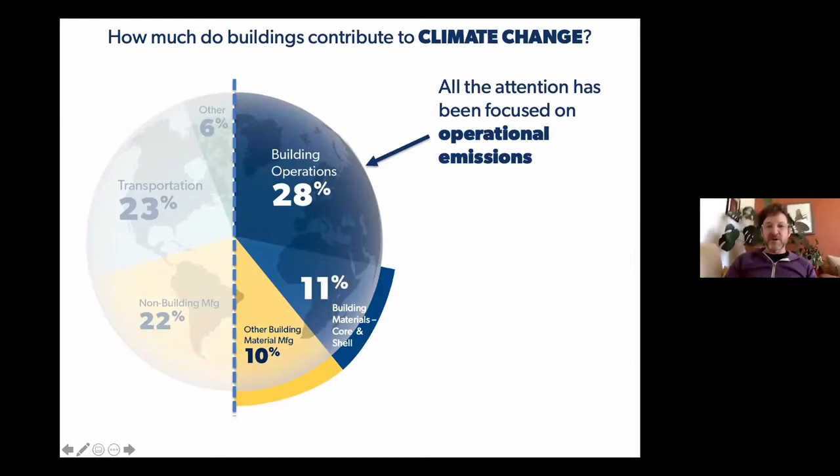That's been a key focus of the work, but it's only very, very recently that any attention has really been paid to the emissions that come from the materials we use to make those buildings in the first place.

The first look at that showed that key core and shell materials—basically concrete and steel—for the building sector were about 11% of total fossil fuel emissions on the planet. But a more recent scan looking at materials other than those big ones shows there's about another 10% of material manufacturing emissions related to buildings.

So, in total, that's 20% of global emissions. This is a piece of the puzzle that we really have to pay attention to.

It's really important because these are emissions that are happening right now. When we bring a building into being, the emissions associated with its materials have occurred in the relatively short time frame prior to us building that building, and that means there's no chance to address them later.

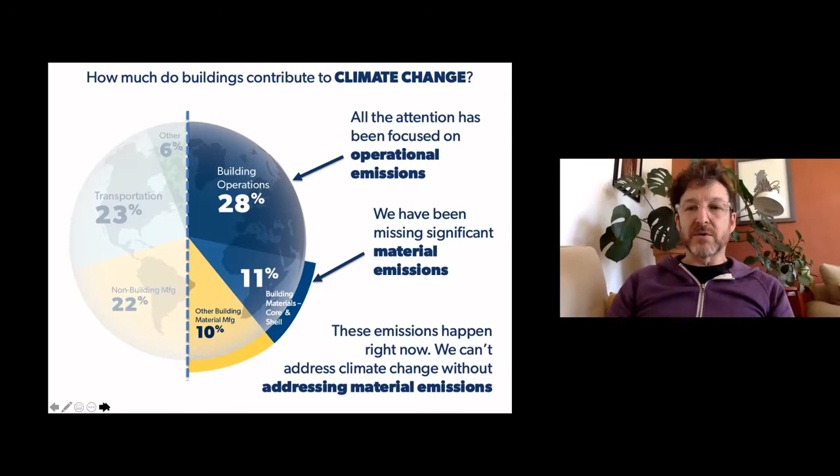With energy efficiency and operational emissions, we can always clean up our energy source and improve the building. But the emissions from materials have already gone to the atmosphere—there's no calling them back or doing a better job once we've committed to those.

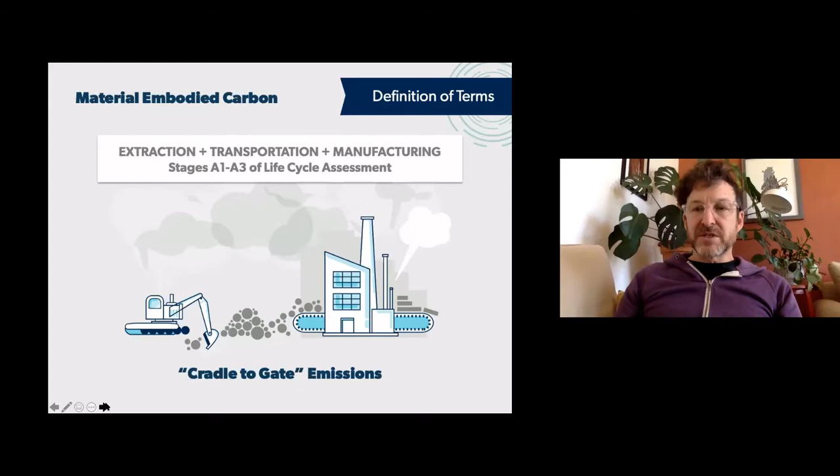I'm going to be focusing specifically on material emissions, looking at the product phase of life cycle emissions. If you're familiar with LCA, this is stages A1 to A3, better known as cradle to gate emissions. This looks at everything that goes to the atmosphere as a greenhouse gas, from harvesting or extracting raw materials, to transportation to factories, and all the processing that happens there. It's everything it takes to get a product from raw materials to a ready to install product. It's not including transportation to the job site, or any construction emissions or end of life emissions.

The reason I'm putting the emphasis here is that these emissions are typically, 60 is a low number, it's more often 70 to 80% of the full life cycle emissions for any building material at this product phase. So this is really the lion's share of this problem. And it's also the part of the issue that we can actually address by thinking about the materials we're using and potentially material swapping.

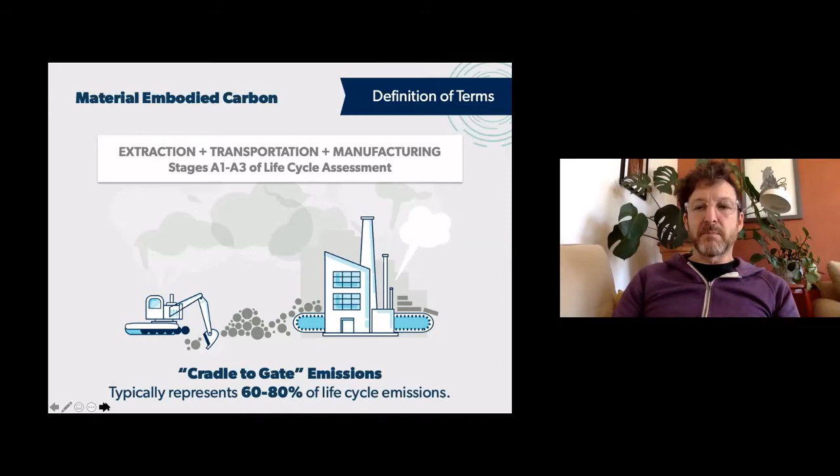That's a little bit about the background, what piece of this puzzle I'm actually looking at today. I'm going to be talking about not only materials that create emissions, but materials that are carbon sinks or offer carbon storage in buildings. Essentially what I'm talking about here is plant-based materials, or biogenic materials. They're very different than non-biogenic materials, because plant-based building materials, whether it's a tree, or a straw that goes into a straw bale, or a piece of bamboo, or a slab of cork, or hemp, and timbers of all different kinds.

There are so many plant-based building materials out there, and all of them draw carbon dioxide out of the atmosphere to grow themselves. Through photosynthesis, that CO2 comes out of the atmosphere, and the carbon atoms stay in the plant. Most dry plant material is about 40 to 50% carbon by weight, and all of that carbon came out of the atmosphere while that plant was growing.

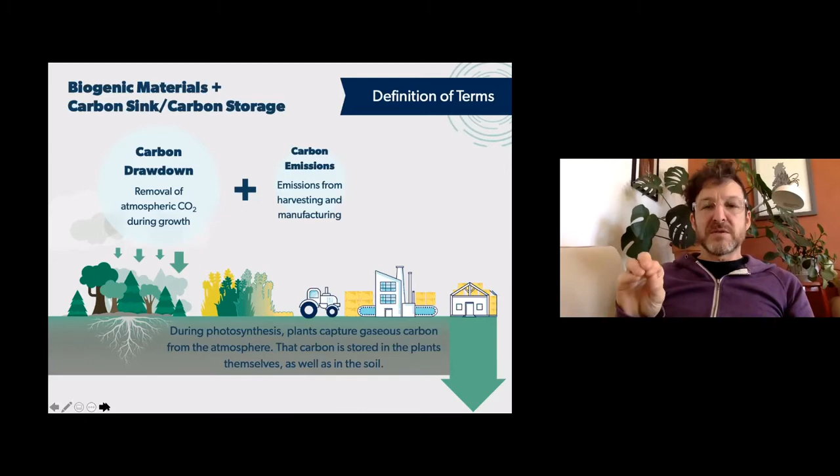In order to transform those plants into building materials, we create some emissions through harvesting and manufacturing. But in all of the examples I've looked at, those emissions are much smaller than the drawdown that happened when the plant was growing. So there's a whole category of materials that offer net carbon storage. As I'm doing the carbon accounting, essentially any materials that have emissions associated with their production are a positive number, driving the carbon footprint of the building up. These biogenic materials are negative numbers in that accounting, and they're drawing that total down.

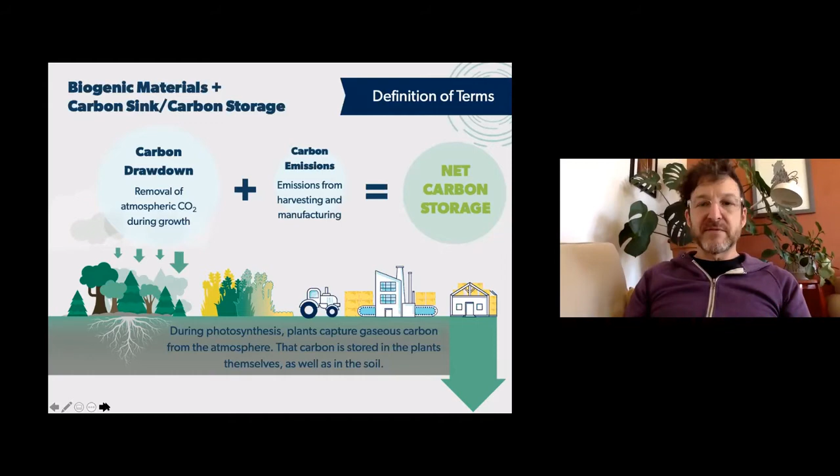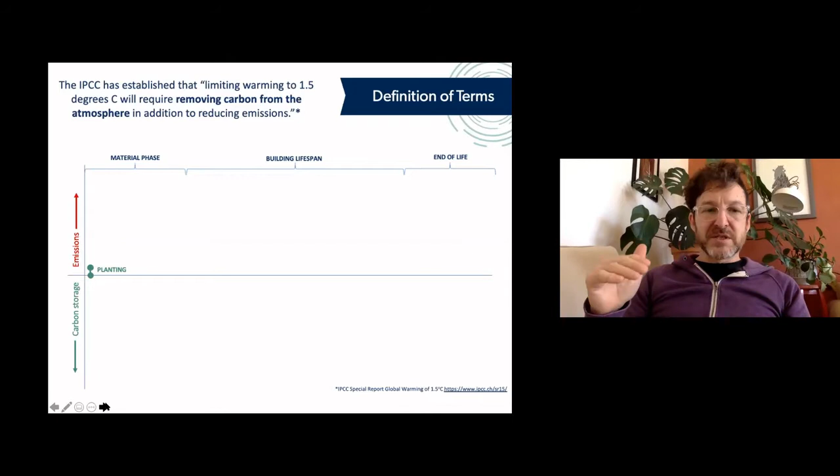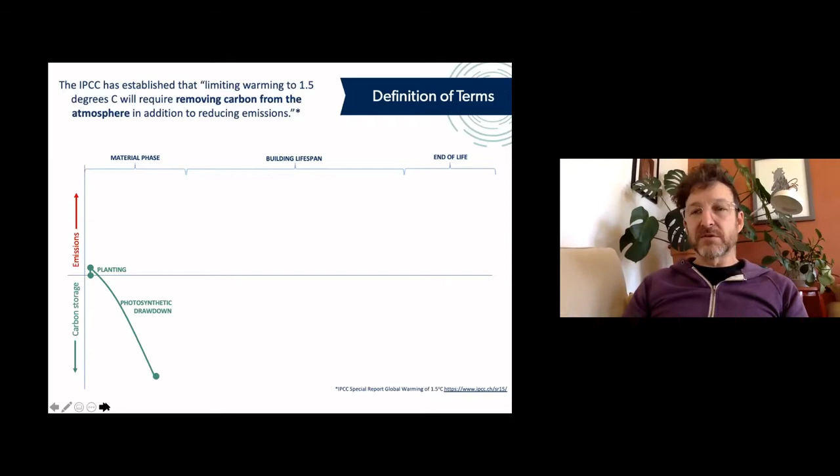Whether that's reforestation or agricultural practices, there will be some emissions associated with that. But over the lifetime of that plant growing, this period of photosynthetic drawdown could be 3 months for a wheat straw, or it could be 80 years for a northern species tree. Whatever time it takes for that plant to grow and mature, it's pulling CO2 out of the atmosphere that whole time. So in effect, there's less CO2 in the atmosphere when that plant is done growing than there was when it started growing, besides the fact that humans keep adding more to the atmosphere.

But you can see what I mean. Then, through harvesting, manufacturing, transportation, and construction, we are going to be adding emissions back into the atmosphere. But as long as those emissions are less than the amount of CO2 that the plant has drawn down, that means over the lifespan of the building, which we would certainly expect to last at least as long as the next few decades, when we're really having to scramble to try to fix the amount of carbon dioxide in the atmosphere.

These plant-based building materials are literally acting as carbon sinks, or carbon banks, or carbon stores. People use a lot of terms for it through the length of time that building exists. And obviously, the longer we can make those buildings exist, the better and more meaningful that storage becomes in the overall climate change scenario.

And then at the end of life, there's a bunch of scenarios where that carbon can continue being stored. So if we can reuse those materials in another building, then with a small amount of emissions associated with taking them down and retransporting them, that stays in storage. Same with if we're able to recycle them into other long-lasting products that keep the carbon in storage.

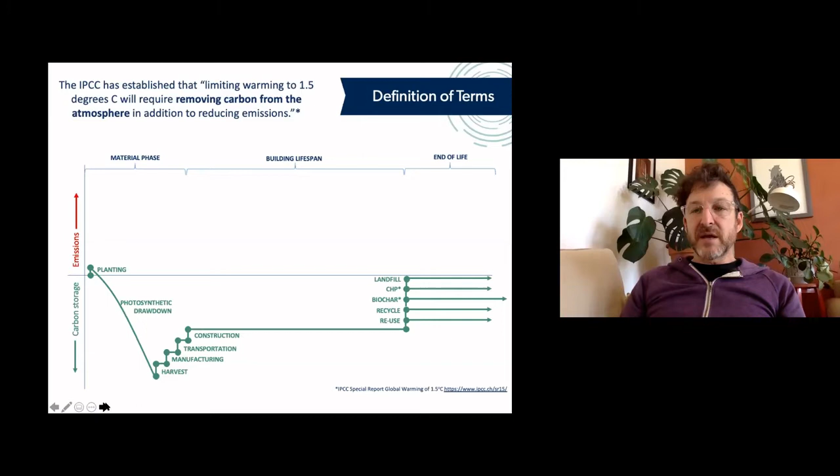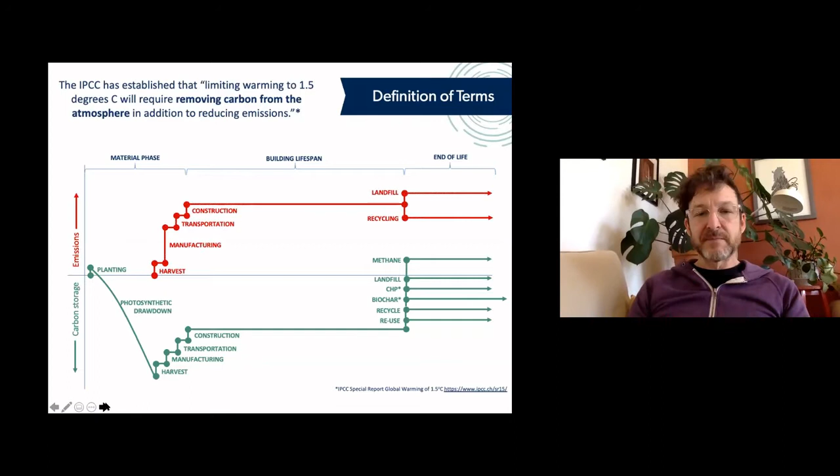If we landfill, it's not the greatest option, but certain landfill practices will ensure that much of that carbon stays locked up for a very long time in the landfill. And of course, worst case scenario, it becomes methane, and we have emissions again at the end of that material's life. So we want to avoid that if we can, because in all the other scenarios, we can expect the carbon to stay out of the atmosphere, or the majority of it, longer than just the building's lifespan. And that maps really differently than any other type of building material.

So it doesn't really matter what the material is. If it's not plant-based, its profile looks like this red line, where every single step along the way is an emission. And the height of that red line—a material with high emissions is going to be higher over the zero line. A lower emitting material will be lower. But wherever it falls, it's all emissions.

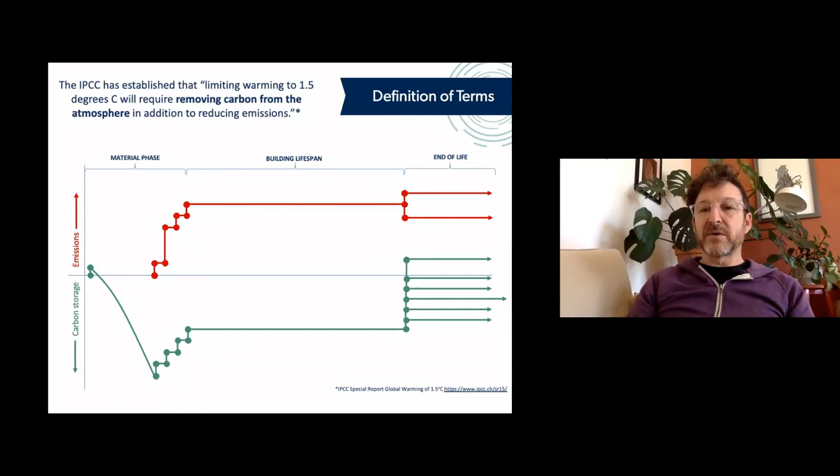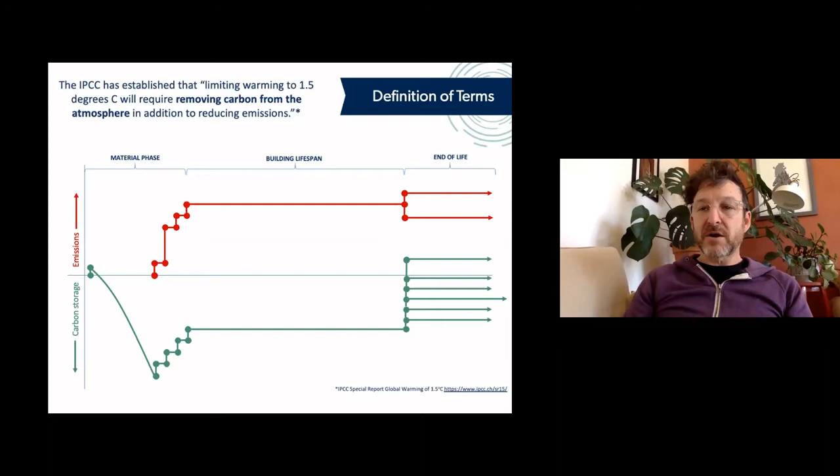And that means that by the time it gets in a building, those emissions are all in the atmosphere, and they're not coming out from the building. And again, even what happens at the end of lifespan, the emissions are still going to be in the atmosphere. So there's a really different scenario between that red line and that green line that is, I think, a really critical piece of our sector being able to really address climate change and to take advantage of buildings as long-lasting fixtures capable of banking and storing that carbon for decades or even centuries.

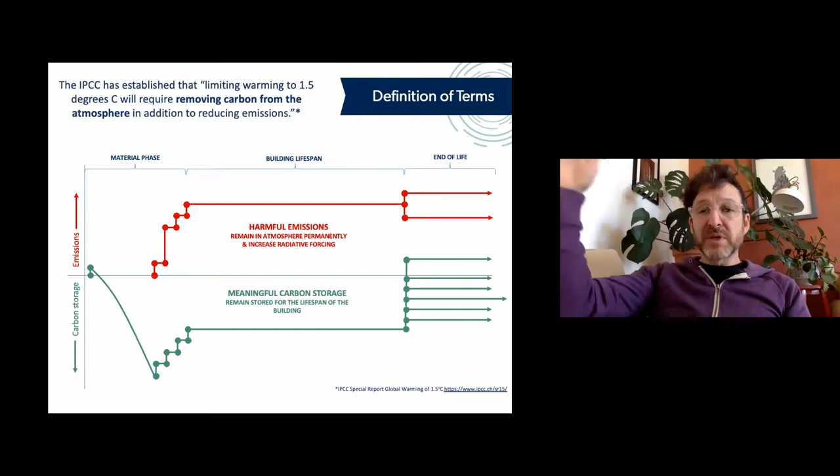And so, you know, in some ways this graph is misleading, because that red horizontal line should actually be an upward curve, because emissions stay in the atmosphere, and the radiative impact accumulates over time. So if we dump a bunch of emissions into the atmosphere making a building, they drive climate change again next year, and the year after, and the year after. So what we really want to do is get our whole industry down to that zero line, or better, below it.

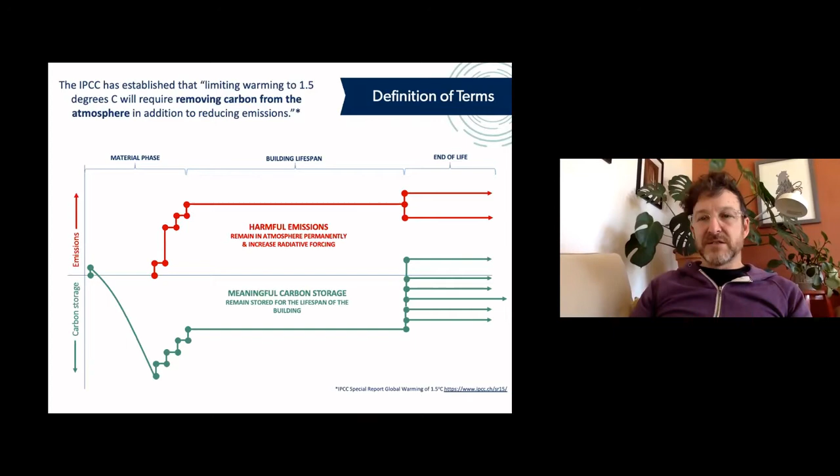So I'm going to show you a study that I did that I wrapped up in 2019, where I wanted to look at the carbon footprint of those building materials in some typical residential type buildings. I'm a residential builder, so that's kind of my focus. So what I did was I picked a really common single family home design, a 2,000 square foot raised bungalow, and a 4-story, 8-unit, 10,000 square foot multi-unit building.

And then I gathered what are known as environmental product declarations, or EPDs, which are sort of like report cards on impacts from products—in this case, building products. And what I like about using EPDs as my data source is that the way an EPD is made, the person accumulating the data is following a set of ISO standard rules. So there's an international agreement on what you include and what you don't include, and how you actually perform one of these studies. And I also like the fact that in order for an EPD to be released publicly, it needs to be either done by, or at least verified by, an outside third party.

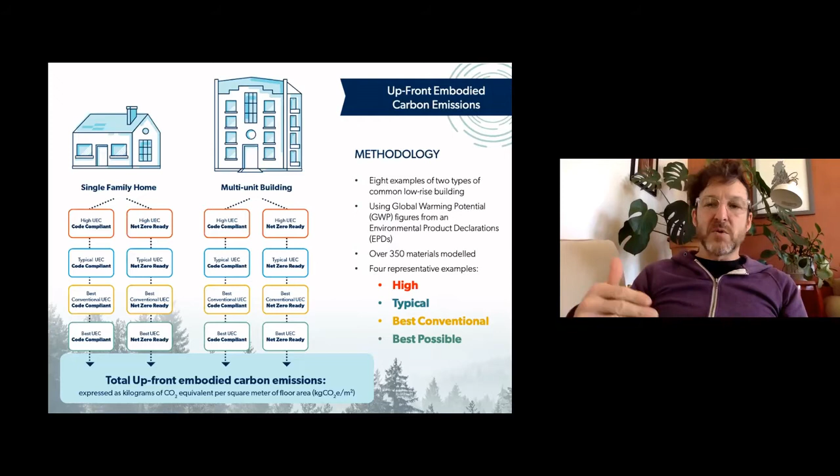So the companies themselves who are disclosing this information—the data is from them and from their operations—but a disinterested third party has been paid to either do the work or review the work and make sure that the rules have been followed.

So in terms of finding comparable data, this is as good as it's going to get for being able to compare products side by side. And what I noticed as I collected EPDs for building materials was that for every single element of a building, whether I'm looking at foundations, windows, flooring, roofing, or insulation, there were always materials that fell across a spectrum of results.

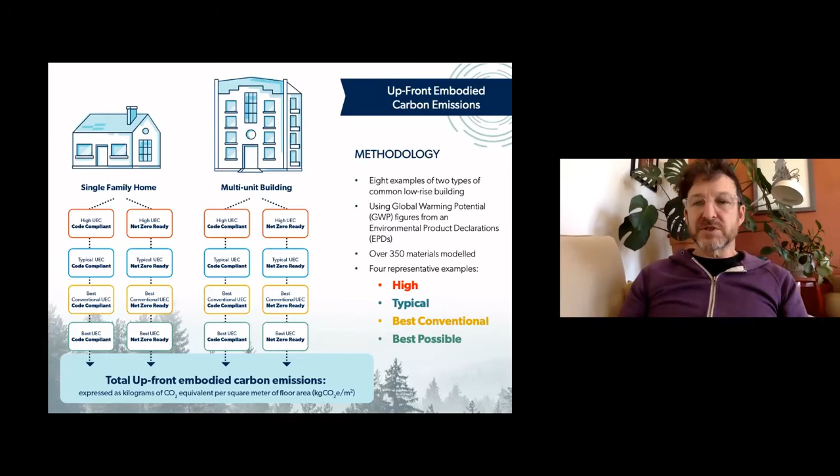So I've characterized those results with a sort of red typology building. In that model, I used materials that were always at the highest end of their category. I used blue to signify materials that were in the mid-range, moderately emitting materials. I used yellow to represent the best materials in their category that are currently widely available and code compliant - I call it best conventional. And then another series of materials I characterize in green, which just had the best, lowest carbon footprint result, regardless of whether they might be considered alternative or not common in the North American market. That wasn't one of the parameters - it was just, what are the best options?

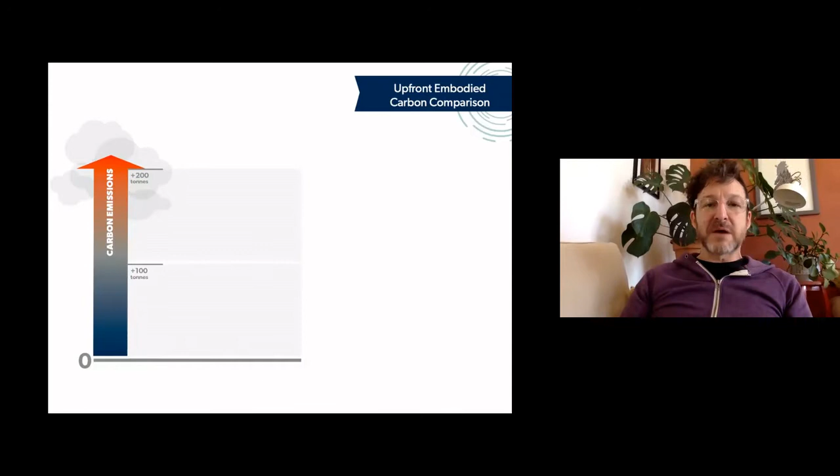So I'll show you what this looks like when I do all the math. I designed the building as though it was going to meet Ontario code minimum standards. I'm showing you the results for the 8-unit building here, but the single family building tracks in a very similar way, although per square meter, the smaller buildings tend to have a higher carbon footprint. So then I did material takeoffs, and applied the global warming potential factor from the EPDs to the amount of material it would take to meet code minimum standards for that building.

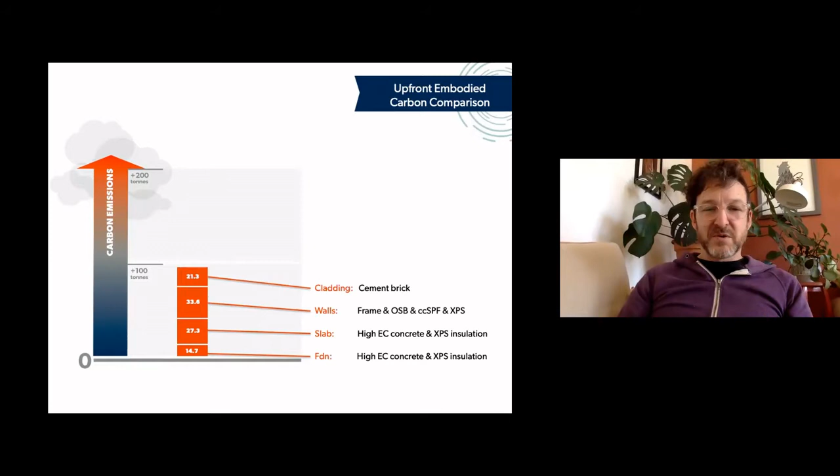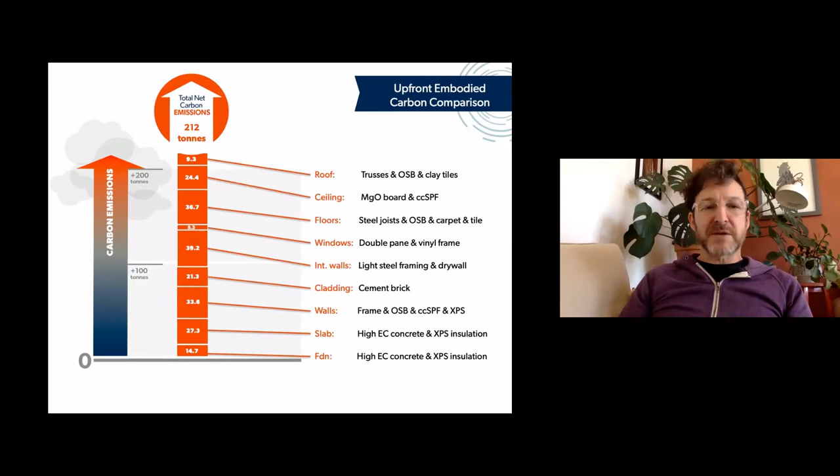We won't dive into all of these materials and details about them. But if I run the numbers for a building with materials at the high end of the carbon footprint spectrum - and if you scan that list, you'll see this isn't a weird building or just an academic exercise in what a high carbon footprint could be. Lots of buildings are built with these materials. In this case, we have over 200 tons of emissions associated just with making the materials for this building.

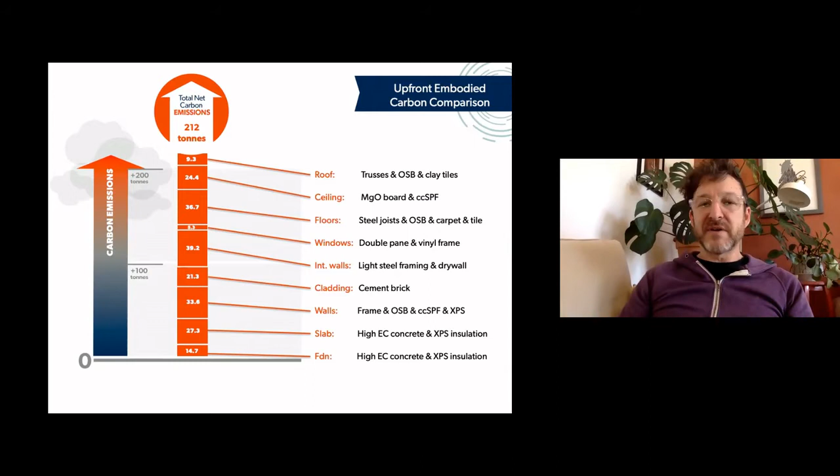And that's a really high amount of emissions, and there's literally no way anybody's going to meet their climate change targets, whether locally, provincially, nationally, or globally, if every single small building that gets built has a carbon footprint of this kind of size. But this is kind of where we are right now.

I then modeled a building where I just swapped out materials for things that were more moderate emitters in their categories. What's interesting is that right away, through some really simple material substitutions, I can bring the carbon footprint of this building down to 68 tons. That's a massive change, a huge improvement, made not by doing anything alternative or out of the ordinary. It's again a very recognizable suite of materials, but I've more than cut that building's footprint in half by swapping out those materials.

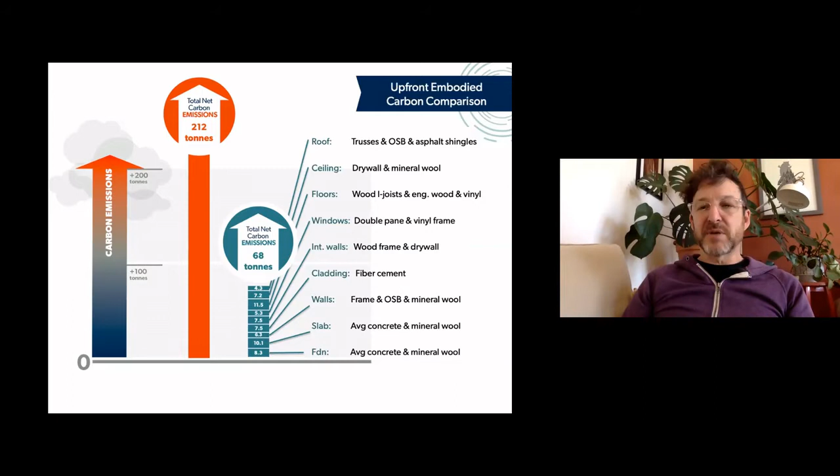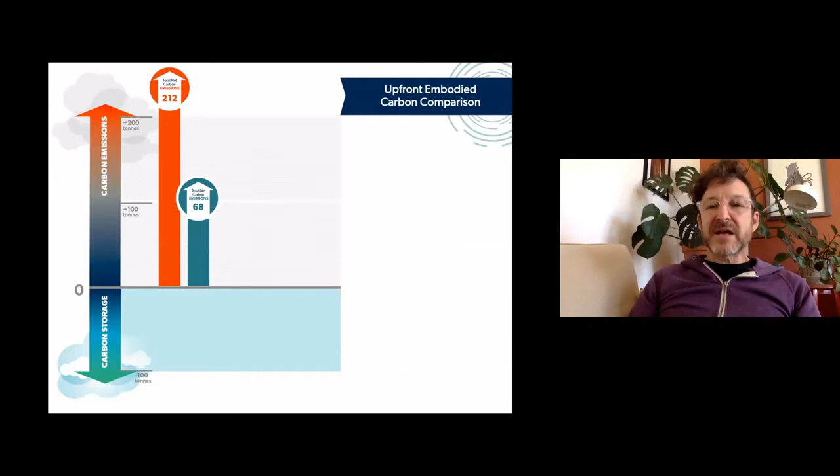Now, my third example building - you'll see the graph has changed here. I've needed to add a storage direction for this graph, because this is the first building that's going to involve some of those plant-based materials. This building actually, to me, was super exciting. It's not something I expected to find in this study, but I was really encouraged by the fact that I did. So here's our first negative number.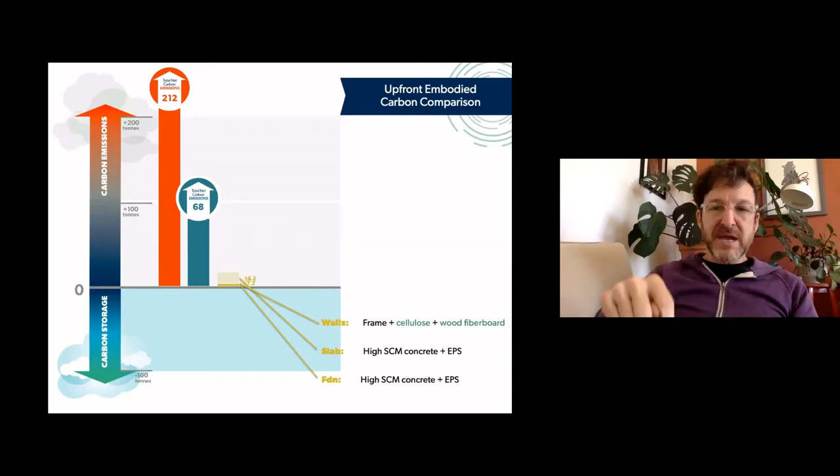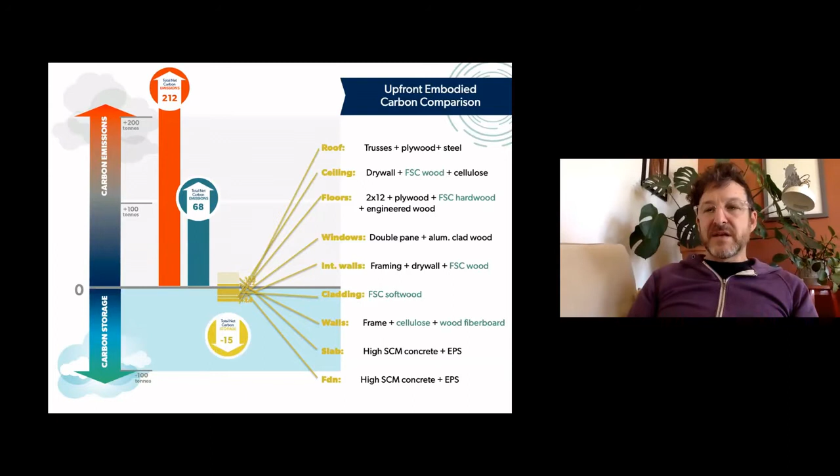You can see, instead of going up, the cellulose and wood fiber board insulation, because of the CO2 stored in them from when the plant was growing, is actually making the bar go down. Depending on the material, the bar goes up or down. But at the end of the analysis, this building is responsible for 15 tons of net carbon storage. The amount of plant-based material in the building is sufficient to offset the emissions from the materials that do have emissions associated with them. Essentially, we've made a zero carbon footprint building on the material side.

So if you're setting out to make a zero carbon building on the operation side, this is the flip side of that - you also want to be trying to make a zero carbon building on the material side. Really, the big changes here are cellulose insulation and wood fiberboard insulation, and the best available lowest carbon concrete mix that I could get in my region, which is pretty widely available.

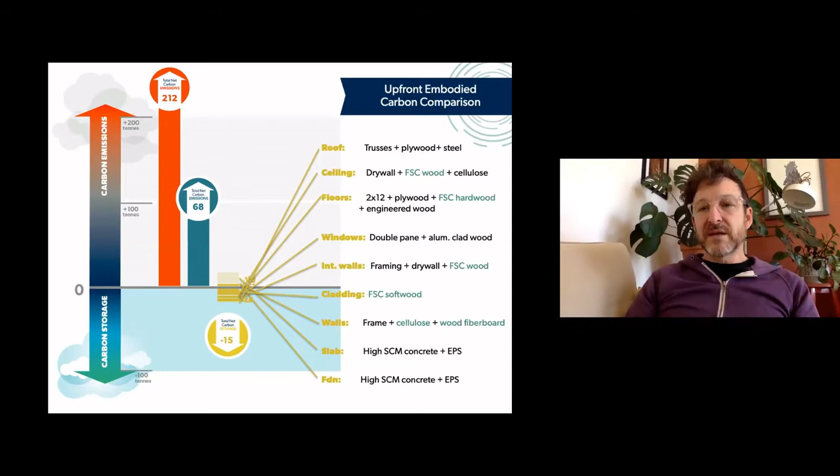And that's enough to tip a building from being a fairly large emitter to being a zero carbon type building.

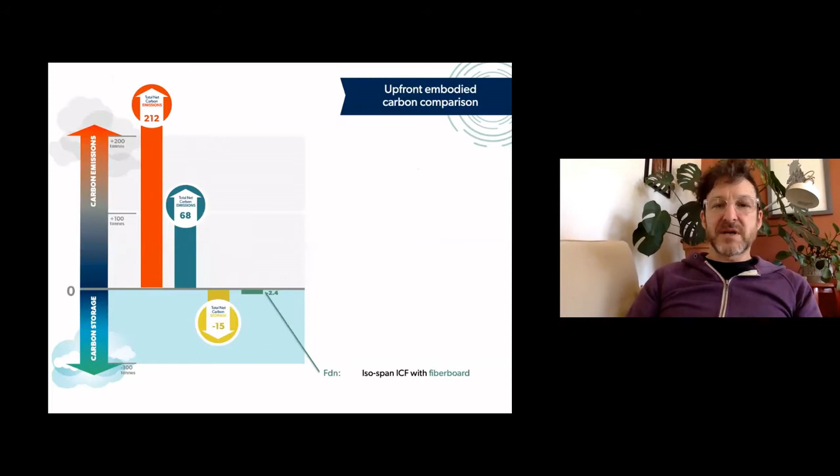My final example sort of maps what we do at the Endeavour Center, the types of buildings I'm commonly doing with our programs, where we use a lot of plant-based material. Here I'm actually able to get that building to store a really significant amount of carbon on a net basis. We're storing 117 tons, more than that blue type building was emitting. That's a really remarkable paradigm flip to achieve with a building.

And these materials are not necessarily all common. They're not things that people are using, but they're certainly within the range of reasonable and practical to move towards and to encourage greater adoption of.

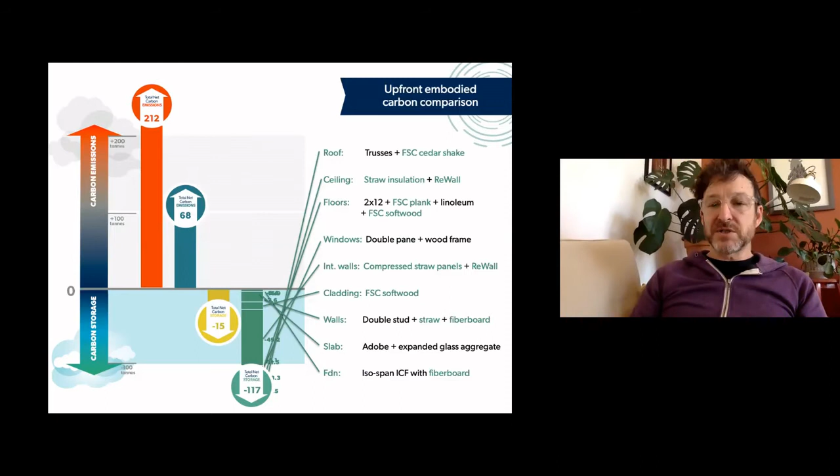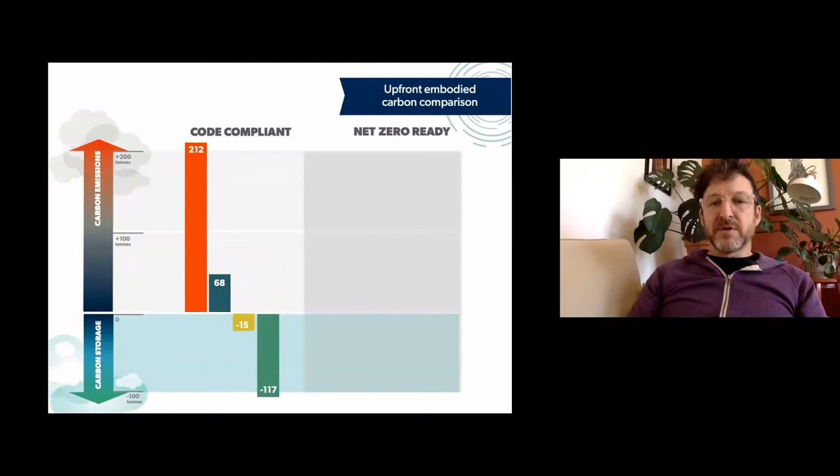The final thing I did on the carbon footprint side for this study was I modeled that building - those 4 bars are the ones we were just looking at. I also modeled the building as though it was going to meet Tier 5 of the upcoming National Building Code net zero ready codes. The interesting thing that happens here is, if essentially the only difference between meeting building code minimum or being more energy efficient is adding insulation and maybe a pane of glass to get to triple pane windows...

If I'm adding insulation that has a carbon footprint associated with it, what ends up happening is that we drive up the material carbon footprint of the building in our efforts to drive down the operational carbon footprint. I'm going to add operational carbon into this picture shortly, so you'll see what difference that makes. But it's important to know that one impact of making a building more energy efficient, if you're using those types of insulation, is that you're paying a greenhouse gas penalty up front in order to do that.

But the opposite happens if we're using biogenic-based insulations. Here we're achieving a great win-win: we're adding more insulation, so the building performs better, has less operational emissions associated with it, and it's storing more carbon up front. So you're doubling your benefit there instead of paying a penalty and trying to recover it through greater energy efficiency.

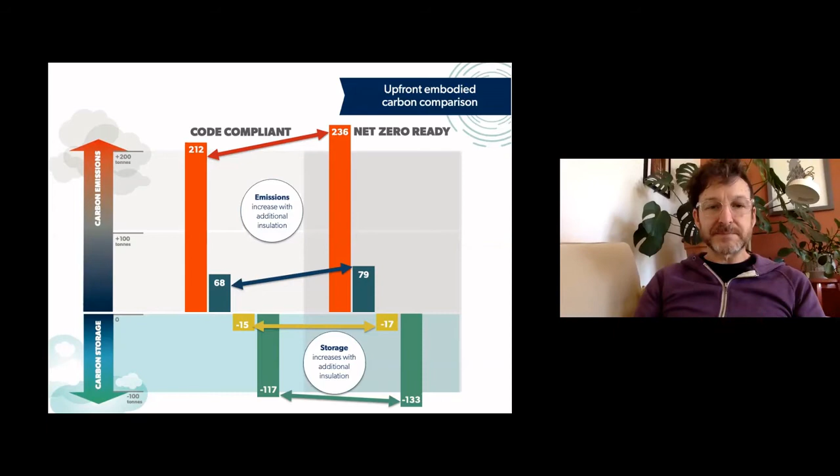But what I want to point out here is that I'm not creating a prescription. I'm not saying that you either build the red building or the blue or the yellow or the green. What I really want to emphasize is that material carbon footprint targets can be just like energy targets, if we think about it.

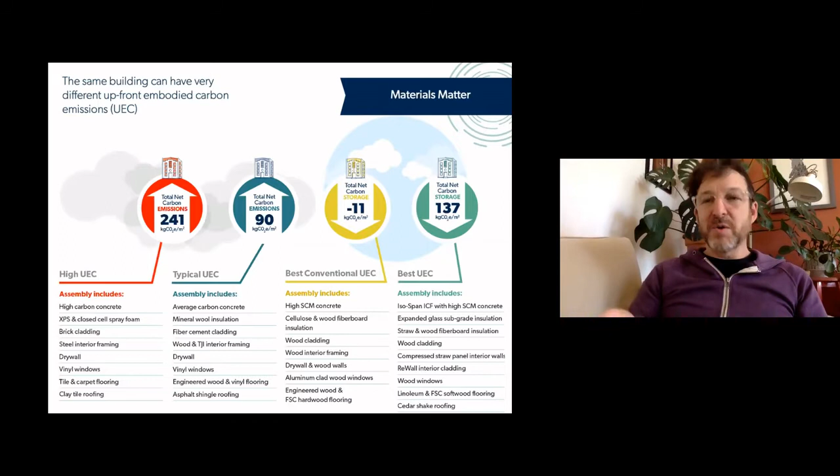The goals we set out to achieve with our building - you just decide with your client or for yourself, I want to hit a 50 kilogram per meter squared material carbon target. Then you go about designing the building and making those decisions and trade-offs the same way you would if you decided, I want to hit R2000 levels of energy efficiency, or I want to get to passive house. However you set your energy targets, you can similarly set a material carbon footprint target and juggle the materials you want to use until you get that version of the building in the most efficient, effective, affordable way that you can.

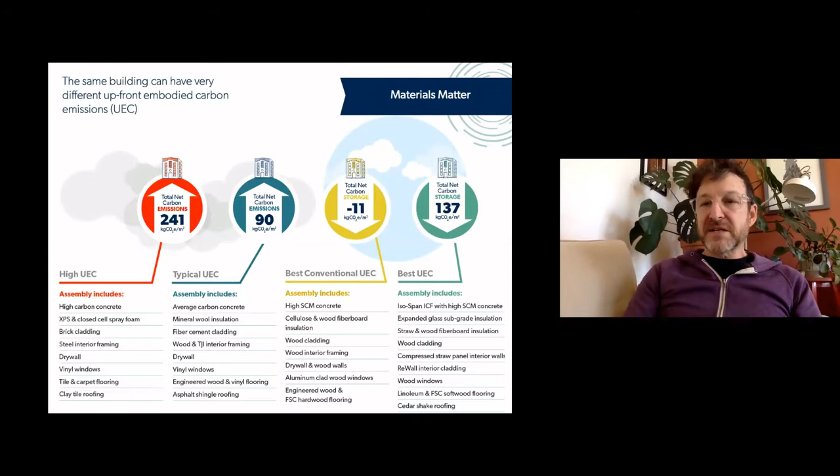So that's looking at what the carbon footprint of materials looks like on a single building basis.

I then expanded that out - apologies here for the US numbers, but most of my presentations these days are to American audiences. The US builds about 240 million square meters of this type of 4-story and lower residential construction a year. If they keep going business as usual - and here I'm using an average of the red and blue type building - on an annual basis that's 54 million tons of emissions from manufacturing materials for residential buildings in the US. And that's 15 coal plants worth of emissions.

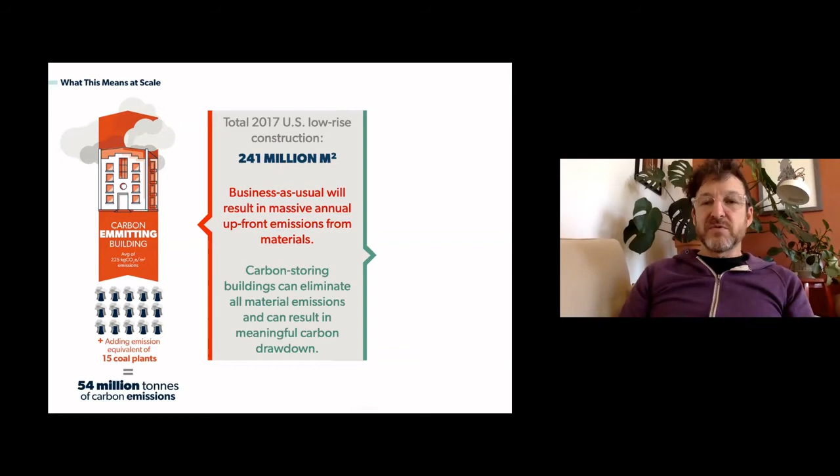Whereas if we're able to flip to the carbon storing side, first of all, none of those emissions happen. So we get rid of those 54 million tons. And additionally, we store another 36 million tons, or do the equivalent of literally taking out the emissions of 10 coal plants worth of greenhouse gases on an annual basis. That's a massive difference, a 90 million ton difference between those two options. I think, as an industry, we're incredibly capable of getting ourselves to the carbon storing side

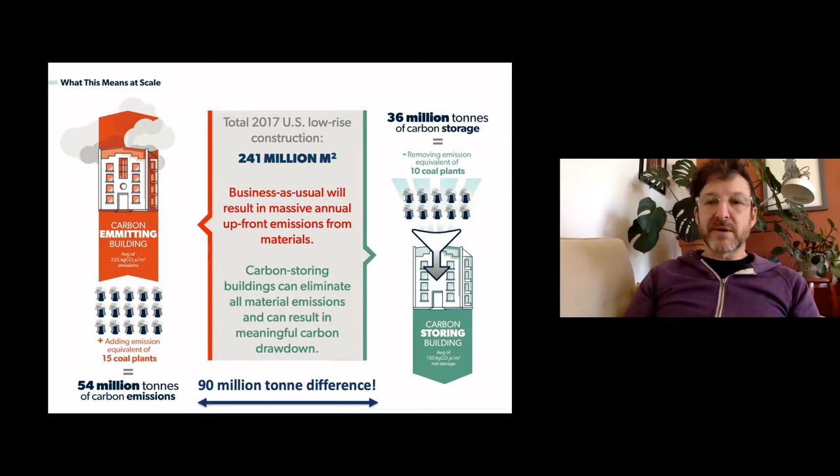of this diagram in a relatively short time if we really want to. So now I'm going to throw in the operational emissions just so you can see how that adds to the picture. So here's our two graphs again, our 4 building types in code compliant and net zero ready form. And I'm adding natural gas heating for 30 years. This is mapping 2020 to 2050 in the Toronto, Ontario climate zone. Obviously, if you did this for Winnipeg or somewhere in Manitoba, these numbers would vary, but this is what it looks like in Toronto.

The code compliant building, in whatever form, because the materials aren't changing the efficiency, they're modeled to be exactly the same level of performance. That means there's going to be 10 tons of greenhouse gas emissions from burning that natural gas every year, or 300 tons over the 30 years. You can see that that's a pretty significant part of the carbon footprint. And in fact, as your material selections get better, the impact of the operational becomes a much bigger piece of the overall puzzle.

Interestingly, when we get to the right side here, even though these buildings have the same 300 tons of emissions associated with them in their operation, because they start at a negative number, by the end of operating this building on the right with natural gas for 30 years, you can build the building and operate it for less emissions than just building that red type building of the same size and efficiency. So really important to see that material impact.

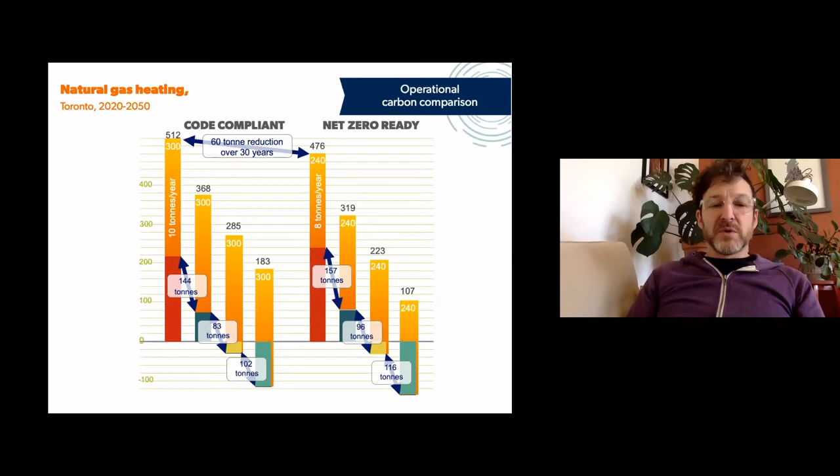In its net zero form, we've knocked 60 tons of emissions off of these buildings. So 2 tons a year for 30 years, and that's great, that's incredibly important. But if we look at improving our material profiles, then we'll see that any movement, even from the red type building to the blue, or the blue to the yellow, et cetera, on down the line, every one of those improvements is a bigger emission reduction than changing the building from code compliant to net zero ready.

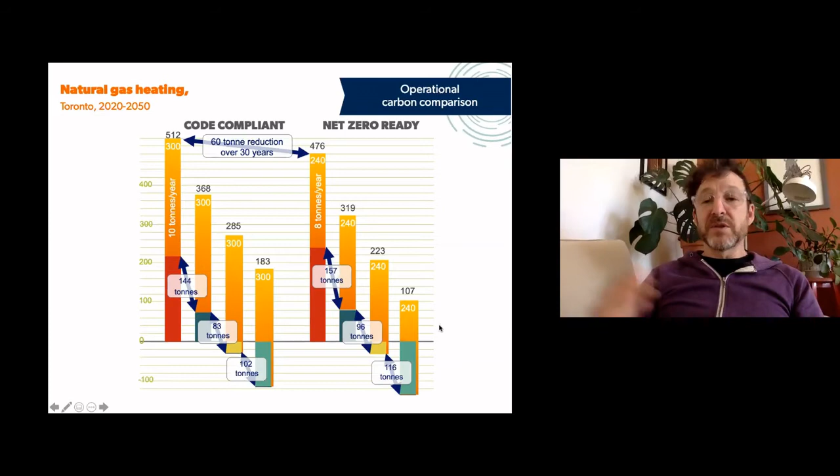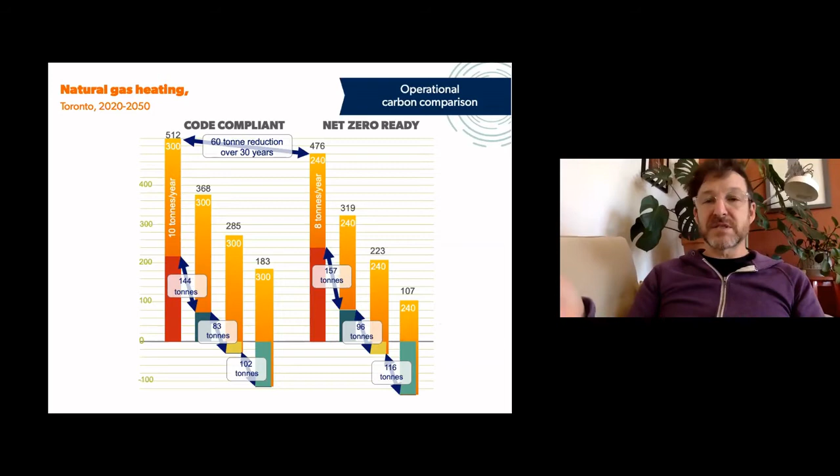I tread on thin ice here, and I really don't want anybody to think that I'm suggesting we ignore energy efficiency and only look at materials. I think it's really important to do both, because we will get the best results for the climate if we're actively thinking about both of these things, where we can use the best materials and the highest degree of energy efficiency to absolutely minimize the footprint of our buildings.

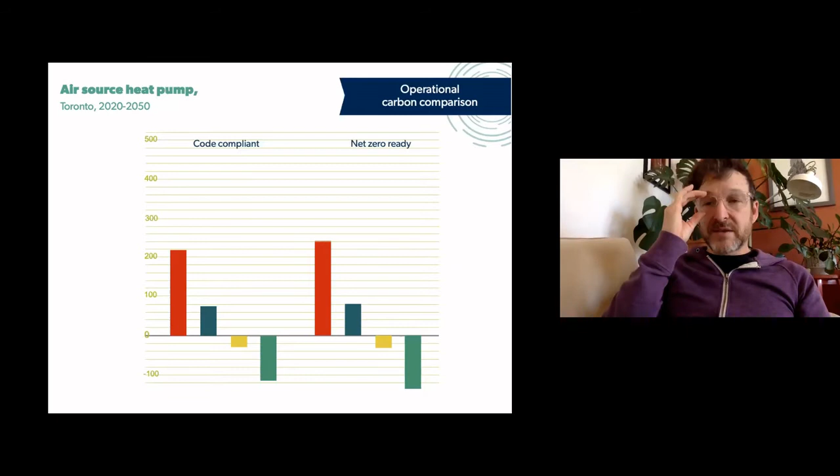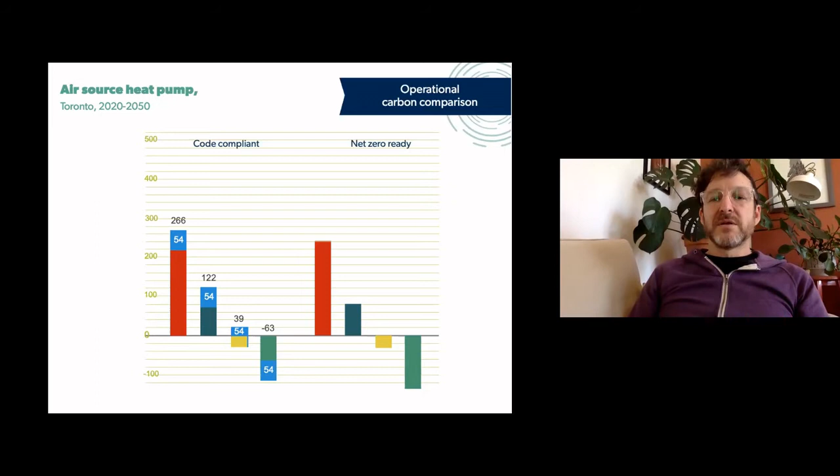The last graph I'm going to show you, and then we'll get away from graphs. Sorry for all the graphs here, but this is taking the exact same buildings and now looking at their emissions profile if I heat them with an air source heat pump using the Ontario grid carbon intensity. It's pretty remarkable how much lower the operational emissions get when we electrify that building. Obviously, this depends on your grid, you get a very different answer in Quebec than you do in, say, Boston, Massachusetts, where the air source heat pump looks almost like the natural gas.

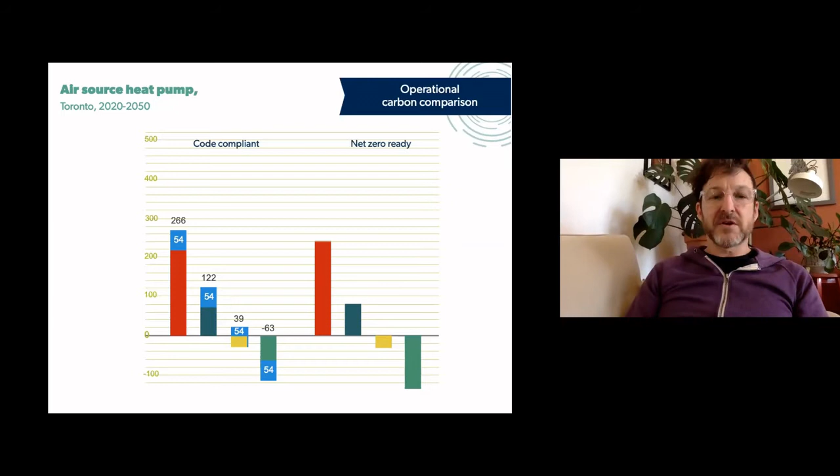One of the important things to remember with switching to the electric heat source here is that at least there's the opportunity to reduce the carbon footprint of our electricity grids. Whereas if you're going to burn natural gas, you're always going to burn natural gas, and it's always going to have the same amount of emissions associated with it. So here we've dropped the 300 tons to 54 tons on the code compliant version. And what's interesting is the net zero version, we've only dropped it to 48. We've hardly made a difference, because saving operational emissions when you're not making very many, there's not a huge payback for it.

This is where we see that we're actually not making back that penalty we're paying for more insulation, at least not in this first 30 years. Over a longer time frame, you would start to see that reduce. Not to say we shouldn't be making these buildings net zero ready, but we have to make sure that if we're putting time, effort, and money into making a net zero building, hoping we're helping the climate, and we're not, you want to know that. You really want to make sure this is something you're doing intentionally.

Ideally, you can see some of these buildings at the net zero ready stage, the yellow and green type buildings. The yellow one is almost a zero carbon building for the first 30 years, in operation and materials. The green type building is a site of net carbon storage for over a century. So this is the kind of result where you can say, wow, we actually could, as an industry, make a big impact on climate change if our buildings were doing both of these things, operating efficiently on clean power with carbon storing materials. That building is actually helping to drive climate change reversal instead of just not impacting climate change quite as much.

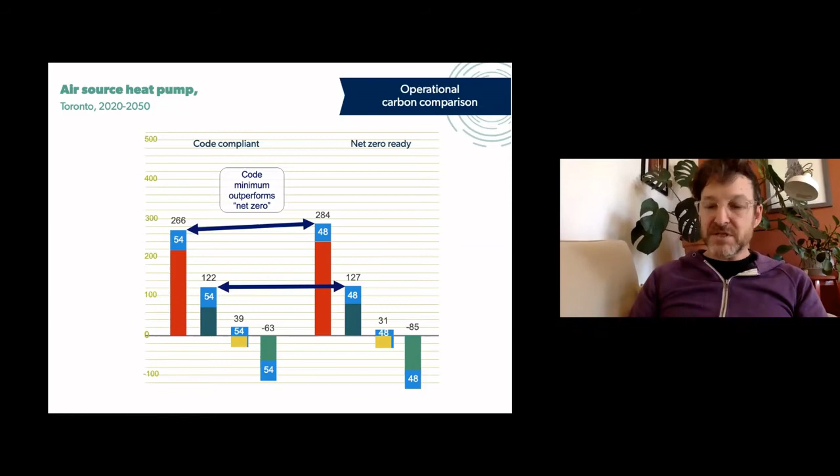So the wrap up to this, and what I'd like you to think about for your own practice, is a carbon use intensity metric that takes both sides of this equation into account. There are two parts to the way buildings impact the climate: upfront materials emissions are one part, and operational emissions are another part. If you're not adding those together, and you're just focusing on the operational side, you could literally be having the wrong kind of impact, even though you're putting all your time and effort into trying to have the right impact. We need to be looking at these two things together, thinking about carbon use intensity as a combined metric.

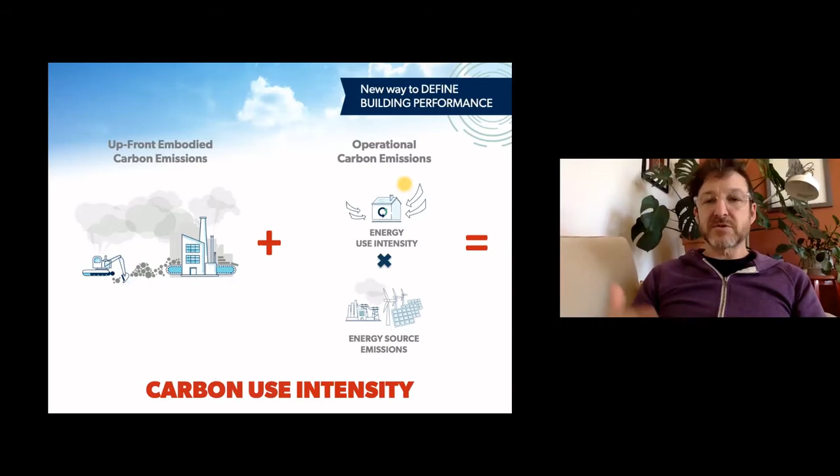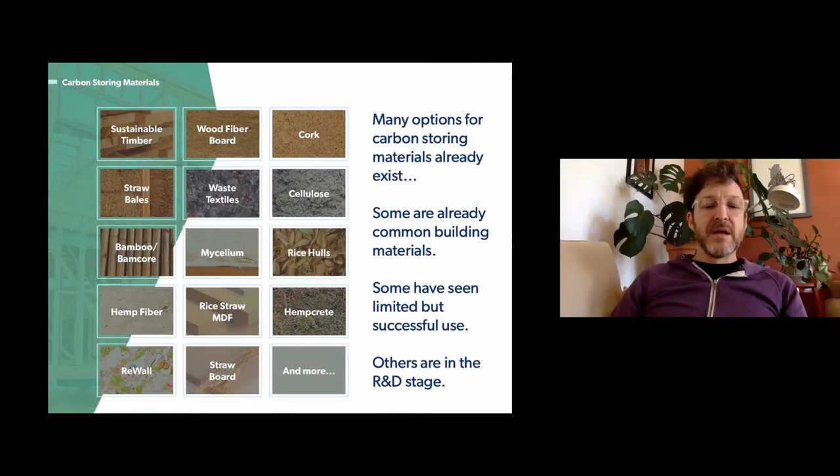I just want to quickly draw your attention to the range of plant-based materials that are available, and this is just a fraction of what's out there and what's coming. Some of these are materials we already use or are commonly available, things like sustainable timber, cellulose insulation, wood fiber board, cork, bamboo, those sorts of products have been around. Waste textiles, hemp type materials, there are many different ways hemp can be incorporated into buildings. Straw boards, rice hull boards, there's such a huge array of materials both existing and coming, that if we can pay attention to them, learn how to access them, learn how to use them, start demanding them, start incorporating them into our projects, that's how we will get to those carbon storing results.

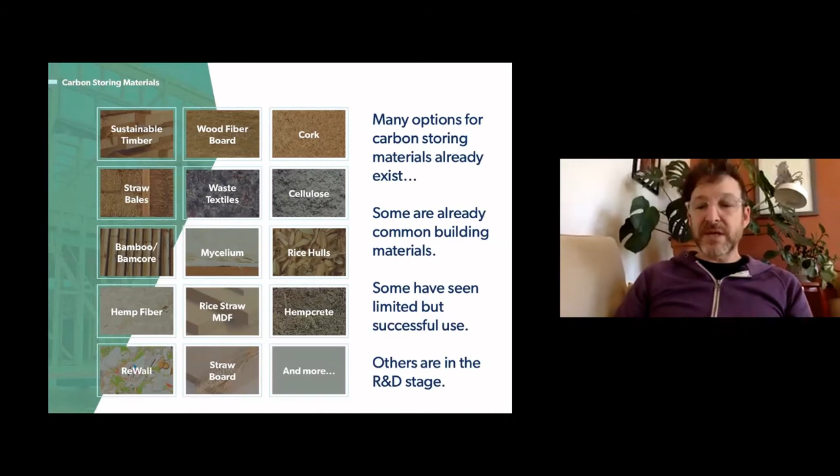I often get the question, so I've folded it into the presentation here: are there enough of these plant-based materials? Are we going to have the unintended consequence of encouraging people to build with plant materials and then stripping the planet of plant materials?

I want to acknowledge that there is the potential for that to happen, especially when it comes to timber. When it comes to carbon storage in buildings, the focus is so heavily on timber because that's the plant-based building material we're most familiar with. And that's the one we actually have to be most careful with, because when we cut down a tree to make timber, if we weren't making that building out of that product, that tree would remain standing, or hopefully it would, and it would continue to be a carbon sink, contributing to the forest ecosystem being a carbon sink on the planet.

So in order for timber to be considered meaningful carbon storage, we have to look not so much at the amount of carbon atoms in a piece of wood, but at whether our harvesting of timber from that forest is contributing to that forest becoming a larger carbon sink. If not, then wood shouldn't be part of this equation. But the materials I'm really interested in that are part of this equation are all the agricultural residues generated around the world, all the plant-based fibers that are in our recycling streams.

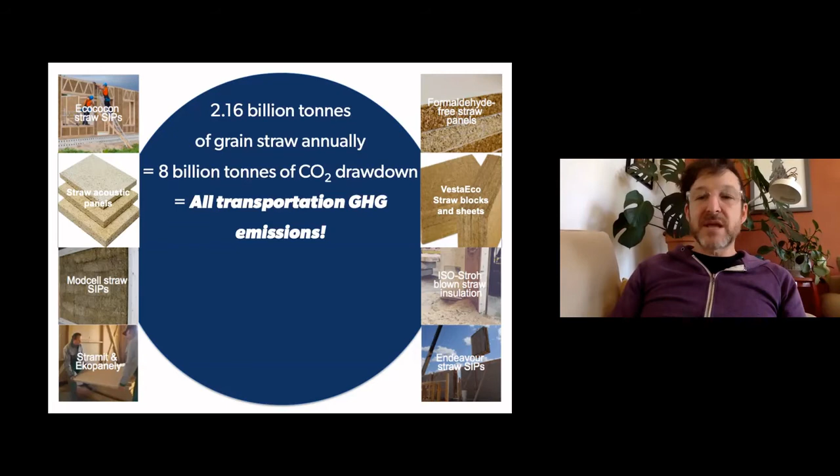So as we try to create these machines that are going to suck CO2 out of the atmosphere and fix our problem, what we need to realize is our farmers are already planting those machines. They're doing their work. All we're doing is, by either burning off those residues or letting them rot, molder, or decompose, we're just sending all that CO2 back to the atmosphere. Whereas if we bundle it up and put it in buildings, we would literally be taking all the carbon from all our transportation emissions and putting it into our buildings.

And so that amount of grain straw, I did some quick back-of-the-envelope math, but that amount of just grain straw - so we're not even addressing all of the agricultural residues that are out there. This isn't sunflower stalks or corn or sugarcane or palm or any of those things. This is just wheat, oats, barley, and rye straws. You could replace every insulation material on the planet and still leave the 20% that most farmers want to turn back into their fields on an annual basis. So we've got lots of it.

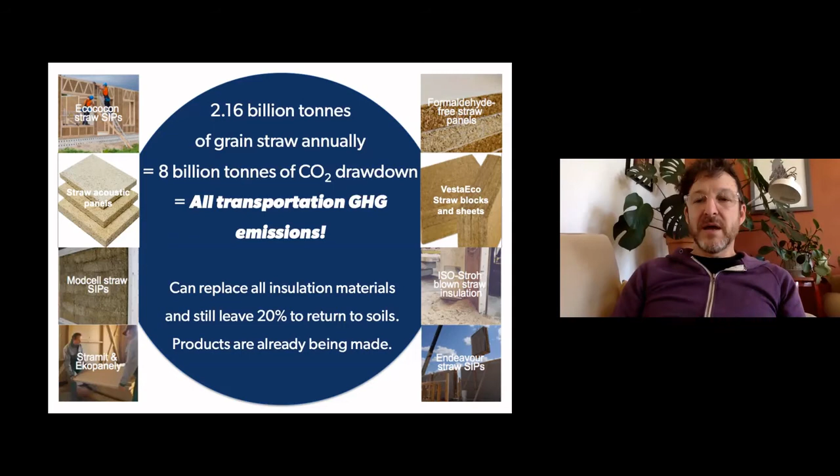You can see from this slide that there are lots of ways that people are taking this particular material and turning it into really viable building materials. And I think if we're going to take our responsibility to the climate seriously in the building industry, our job is to figure out how to smartly get good plant material into our buildings. And that's the challenge. There are lots of people out there meeting that challenge, as you can see by some of these examples here.

I just quickly want to show you now a case study building, just because I showed you a study, and it's easy to sometimes do things in theory but not in practice. So this is a look at one of our buildings from the Endeavour Center, one of the projects we build with our students. This is a building where we set out to have some carbon storage, net carbon storage in the building, as well as making it a net zero energy building and having no toxins or no waste.

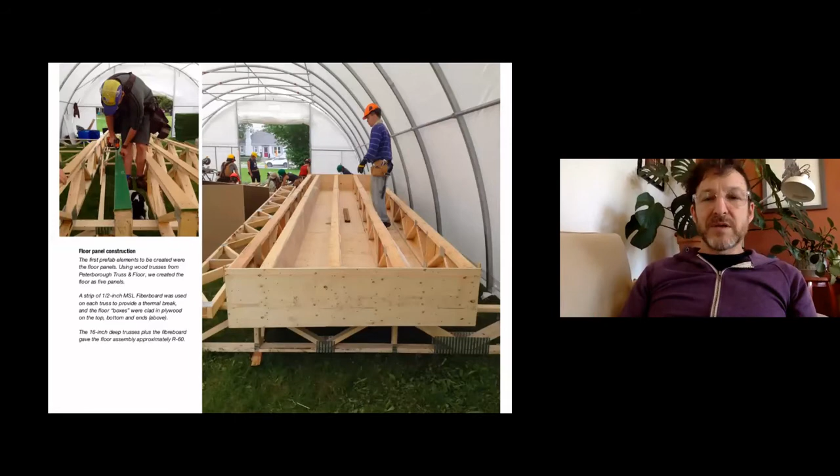And so we prefabricated this building. One of the interesting things about this building is we wanted to address carbon storage in buildings, not just by stuffing a bunch of carbon into this building once, but we wanted to make it in a way that that carbon was most easily reusable at the end of its life. And for us, that meant making this building as a series of prefabricated components that can go together and come apart, and go together and come apart.

Because most of our building stock ends up being scrapped, not because it's met its useful lifespan - like it can't go on being a building - but because the demands for the land or the building change, and we end up tearing down the building to make room for something else. So we wanted to make a building that if it no longer wanted to be where it was, or was needed where it was, it could be taken apart and either rebuilt as is, or the components could be used to rebuild something else. In that way, we can give the carbon stored in the components multiple lifespans.

So we actually built this building in Peterborough, took it down, put it up at a design show in Toronto, took it down, and then put it up for a client a little further north in Ontario. So we were able to sort of prove out that that's a thing we could do.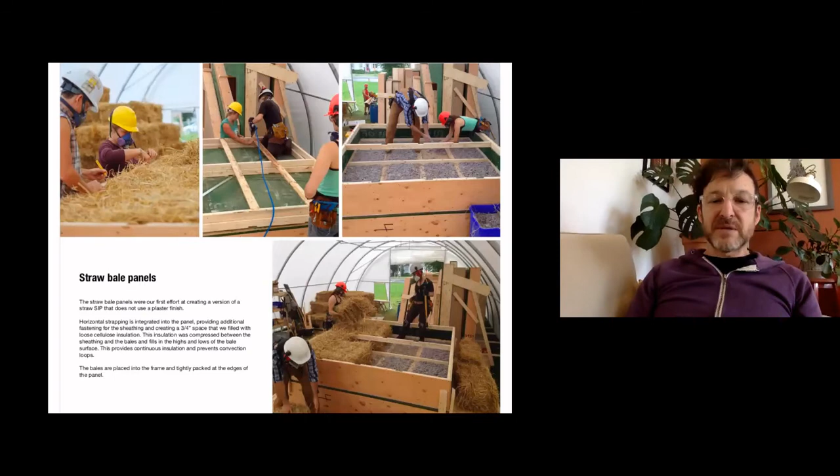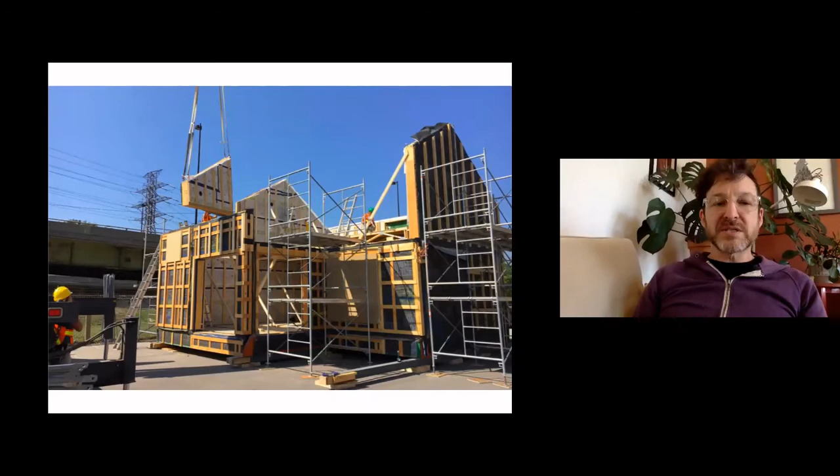So essentially we made glorified wooden boxes. Some of them we filled with common insulations like cellulose. Some of them we filled with less common insulations like straw, like mycofoam, which is a mycelium-based insulation. But essentially, we made a whole bunch of prefabricated components that come to site already insulated, already sheathed, already strapped, and already with their weather, air, and vapor barriers in place, which means it takes us about 8 hours to assemble this building - floor, walls, roof - and, with the exception of big sliding windows and doors, all the windows are already part of the panel when it ships. So you have a closed-in building very quickly.

Then we looked at how can we think the same way with our finishes.

So in this case, we did not use plant-based finishes. Here we're using steel siding and steel roofing, but we chose it because when we looked at the options, this was the one you could take off and put on multiple times, or take off and reuse in a different way, without scrapping or ruining the material.

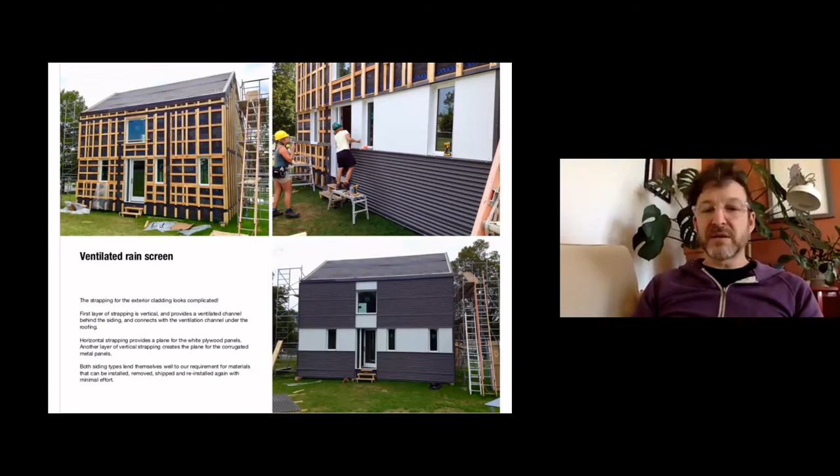We addressed the inside in the same way, using a pre-finished plywood as the interior sheathing for the same reason. We're able to use attractive surface-mounted fasteners so this paneling can be taken on and off, reused in this format or taken to other buildings, extending its lifespan.

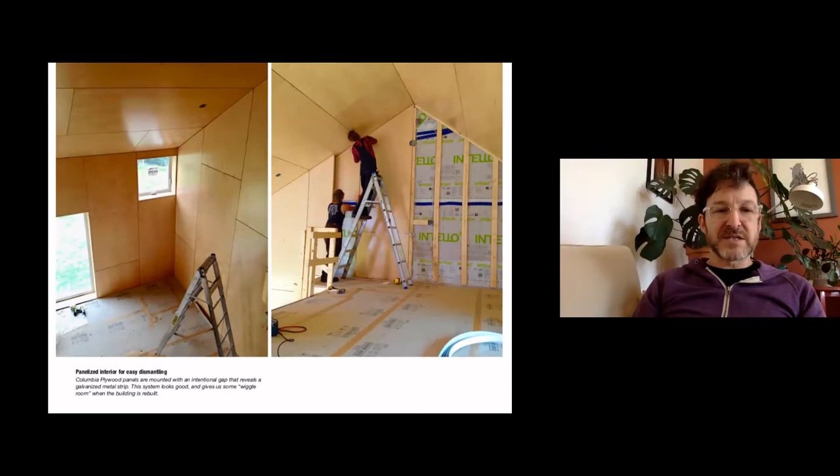We did the whole construction here in Peterborough with only three bags of garbage going to the landfill—that's 20 pounds of landfill waste. The average building this size puts about 5,000 pounds in the landfill, so we're extremely proud of that.

And we managed to make a building that, despite things like steel siding and fiberglass windows and other components that aren't carbon storing, had a net carbon storage of 25 tons. If we'd used a more conventional material palette, it would have had 45 tons of emissions instead. So we were really proud of the whole project, the approach, and the carbon results here.

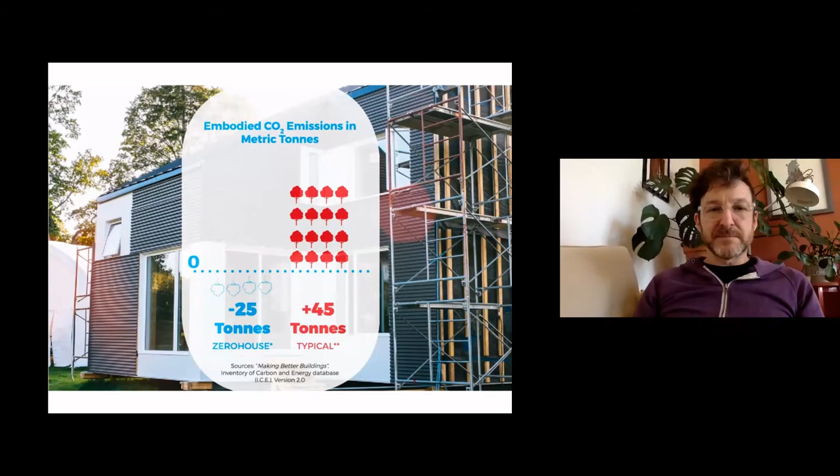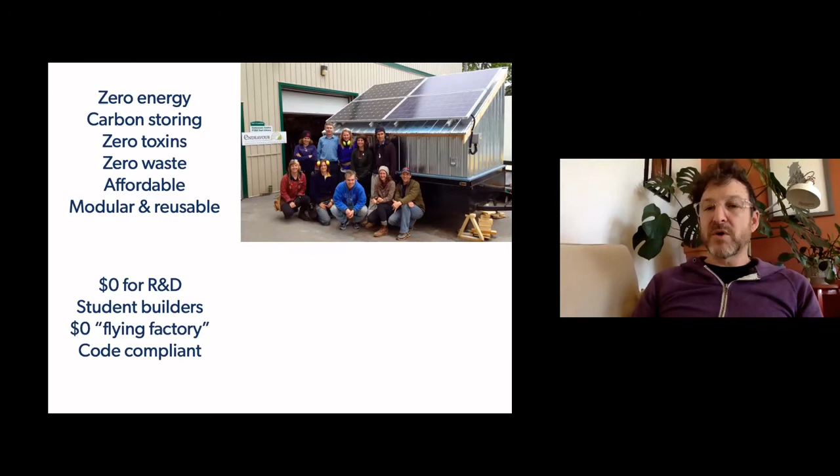What I'm really proud of, and want to point out since you're all building professionals, is that we hit all of these targets with student builders from a small building school with a zero dollar R&D budget. We built a zero-cost flying factory and made the whole thing code compliant in three different jurisdictions. So this is achievable.

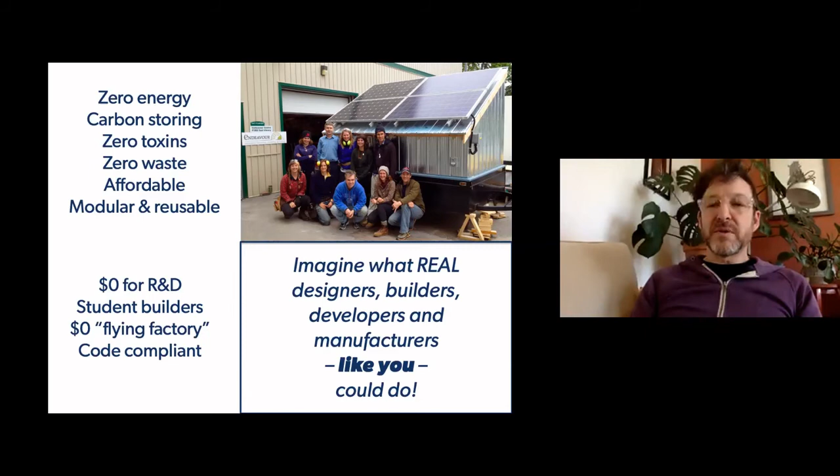That means people who are smarter and better than us at these things, like you, could easily do this, or even do better. So I think our whole industry is capable of being really innovative and forward-thinking, and achieving great things if we put our minds to it.

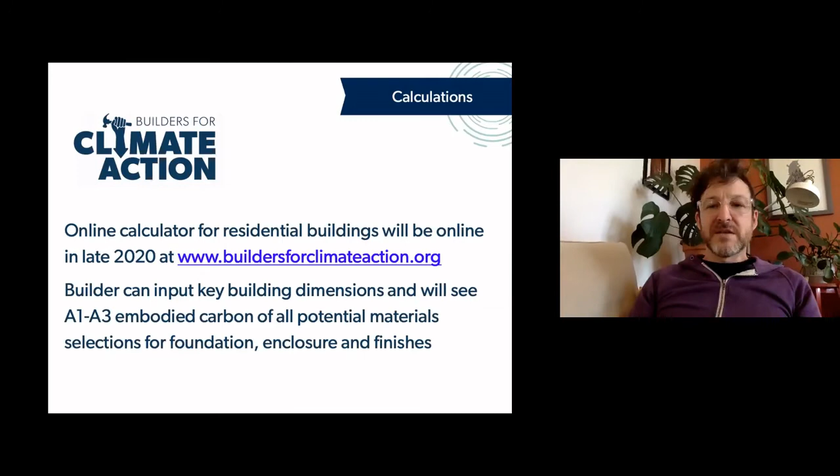I'll just wrap up by introducing our building emissions calculator, our material emissions calculator at Builders for Climate Action. This is going to be online for our members by the end of this year, and essentially it's a straightforward way to look at emissions from materials in a residential building.

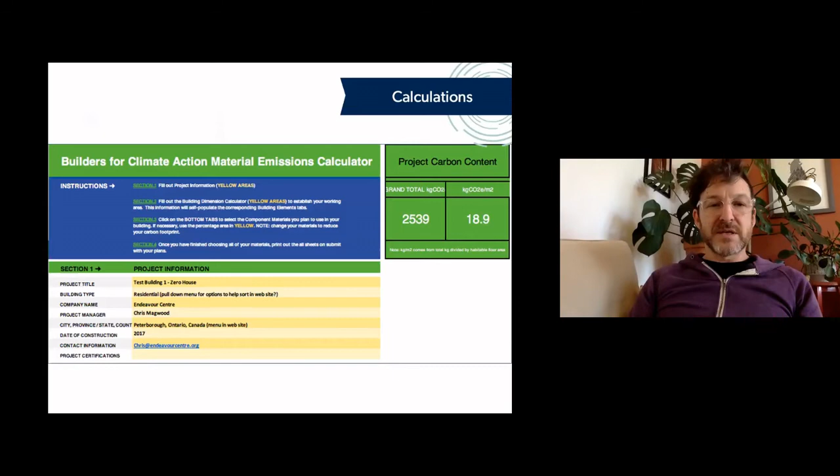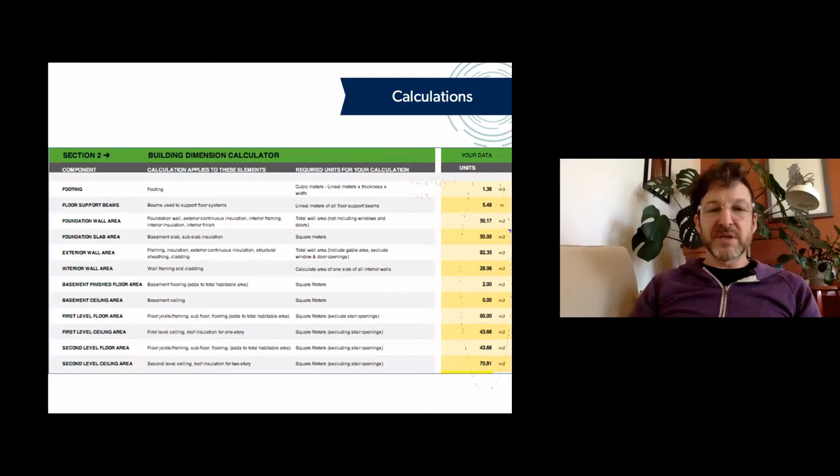We essentially ask you to put in the basic parameters of your building design—the overall sizes and volumes of that building. You put those dimensions into the calculator, and for every component—foundation walls, insulation, framing, roofing, flooring, and all the key enclosure component materials—you get a real-time comparison of the carbon footprint of all these options.

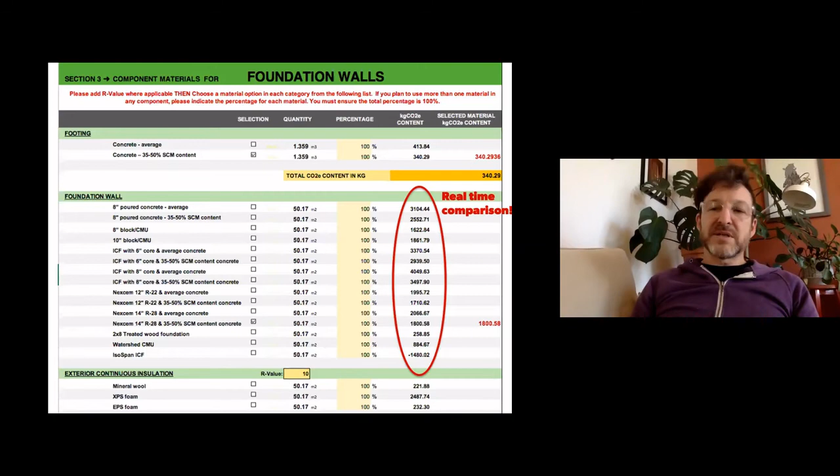So if there are many ways to potentially build the foundation, here's the carbon footprint of all those ways, which allows you to knowingly start making choices. As you choose your materials, the totals of each material go to a running total, and you can see the total carbon footprint of your building. We have various ways you can view that, so you can see where your big carbon footprints are and go back to find ways to reduce them.

I'll wrap up by saying that even though it might not be the next step in your path to making really high carbon storage buildings right away, there's a very logical, stepped path to get there. First, just stop doing the very worst things—make your building out of better materials, understand the carbon footprint of those materials, get involved in doing those calculations, and make your building energy efficient.

But if you put your mind to it and set up a 5 to 10 year plan, you'd be able to move along this progression in a way that's cost effective and works with your business model, without throwing everything into chaos—getting us within a decade to the point where we're no longer one of the industries driving climate change, but actually playing a significant role in starting to reverse it.